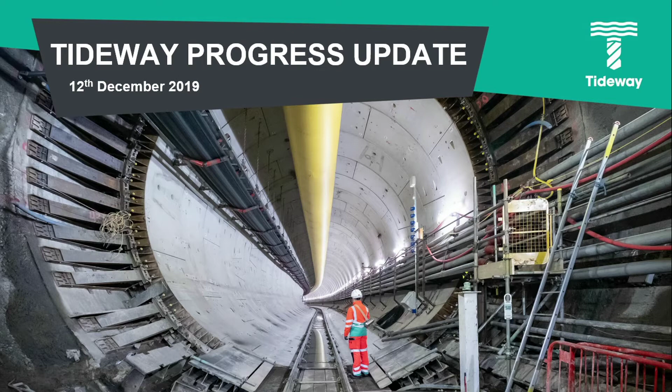Thank you, Ivor. Good evening, ladies and gentlemen. Thank you for the opportunity to give you an update on the Tideway programme and the work we're doing. I'm going to be very brief because the main event is the 4 guys who are going to get into the detail, and that's who you really want to hear from. So this is just a very brief overview of the programme as a recap in case you're not familiar with it - a quick overview on where we are on the project overall, and then I'm going to hand over to the guys.

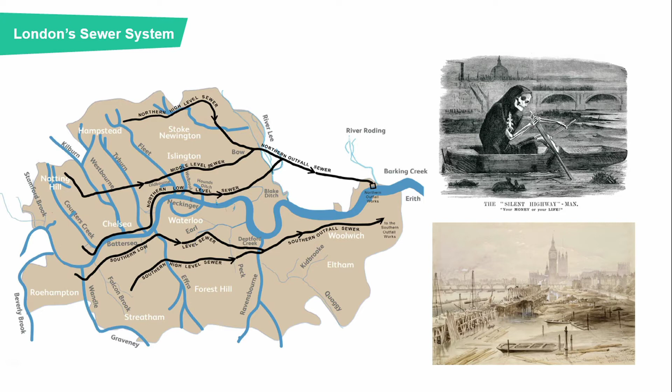We've been through the introductions. I'm sure many of you are familiar with this, so I'll be very brief. This is what London looked like in the 1850s - all of the tributaries flowed into the River Thames. The river basically was the sewer system, and people were pulling drinking water out of it. There were major cholera problems, a huge public health issue, and something had to be done about it. Sir Joseph Bazalgette was the city engineer. He undertook a fantastic project to build interceptor sewers, which intercept the tributaries and carry everything out to the east, to the estuary, solving the problem.

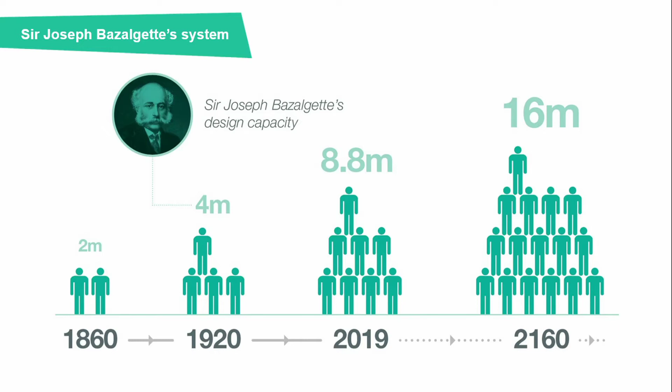It's a fantastic piece of work, still in brilliant condition, but the problem now is capacity. Sir Joseph Bazalgette designed the scheme at a time when there were 2 million people living in London. He designed it for a capacity of 4 million people. But now there are nearly 9 million, and it's continuing to increase. The issue is capacity, particularly in the summer when there are short duration rainstorms. With the amount of hard paving in the city, rainfall gets into the sewer very quickly and it reaches capacity, overflowing into the river in places like this.

These were overflows designed into the system as a safety valve, but there's now on average 50 million tonnes of untreated sewage going into the River Thames every year. Because the Thames is tidal, that doesn't flush out of the system very quickly - it goes downstream and comes back upstream, and can take a couple of months to get out of the estuary. It's harmful to health for people who work on and use the river for leisure purposes. It obviously looks pretty bad for one of the world's greatest cities, and it kills fish.

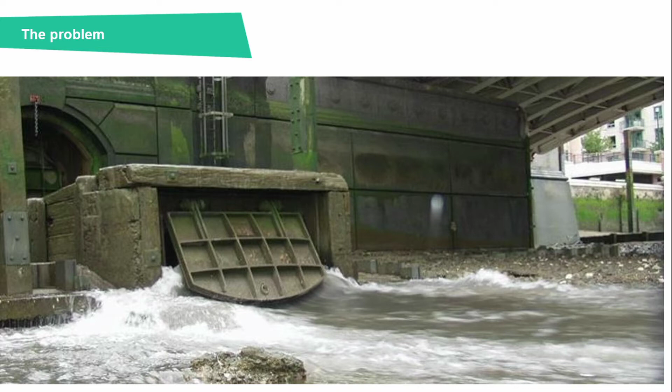If you get a sewage plume going into the river, it can have a big effect on the fish population. It can kill fish when they're spawning, and the Thames is a spawning ground for fish in the North Sea, so this is a major problem. But fortunately, we're here to do something about it.

So the sewage, when it's operational, will overflow into the shaft and down into the tunnel. Our tunnel is basically a big storage system, and then when the rainstorm has passed, it can be pumped out through Beckton Sewage Treatment Plant to stop the sewage going into the river.

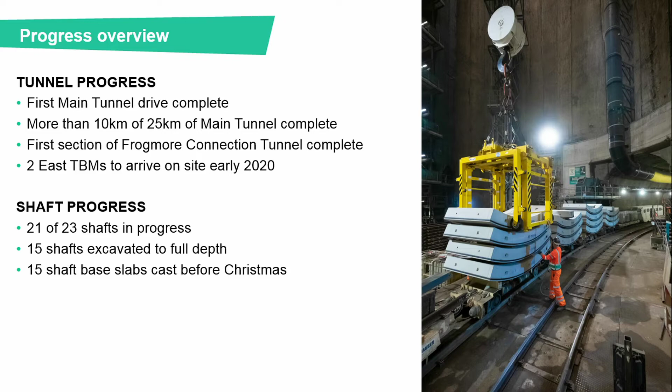In terms of the shafts, we've got 23 shafts. Of those, 21 are at various stages of progress, and 15 are at full depth. As of tomorrow, 15 of those will have their shaft base slabs in. So again, we've made really good progress on the challenging work of getting the shafts excavated through some pretty difficult ground conditions and in some quite complex locations, which the guys will talk about.

So really, that's the kind of overview. I'm going to hand over. We've got presentations from Lee and John and Tom on Albert, Putney and Blackfriars sites to give you a flavour of what's going on there, and then Ed's going to talk about the TBM drives and what we're doing on the TBMs, and then I'll come back and just do a very quick wrap up.

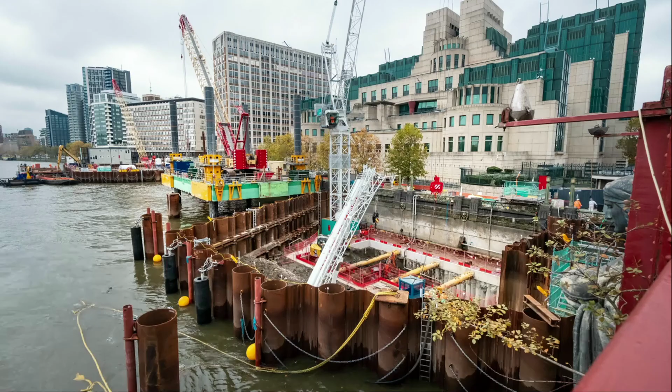I think this photo shows where we are in relation to the land. We're all out in the river. We've got very little space on land to actually do any of the work we're delivering here, which makes it a real challenge, and as Andy was saying, the marine logistics become key.

I put this slide up to sort of pick up on some of the stakeholders we've got. Obviously, being in the river, we have quite a few consents with the Port of London Authority, Environment Agency. You can just see the river wall in the background there that we're amending. The Marine Management Organisation as well.

The bridge here that the photo is taken on is Vauxhall Bridge, so one of TfL's key assets in the area. Behind, you may recognise a building from James Bond films, which features as MI6, so we have some specific security arrangements around that. And then the buildings in the background are owned by the Duchy of Cornwall, which is Prince Charles's trust. So some challenging stakeholders to deal with.

The button's not working. I'll try that again. There you go. I went backwards.

What are we doing at Albert Embankment? We're picking up 2 combined sewer outfalls, one either side of Vauxhall Bridge. So at the top of this picture, you can just make out Vauxhall Bridge there. The Brixton sewer runs on one side and the Clapham outfalls to the other. We collect the sewage from both of those. We take them into the interception chamber, which is the green structure on the diagram.

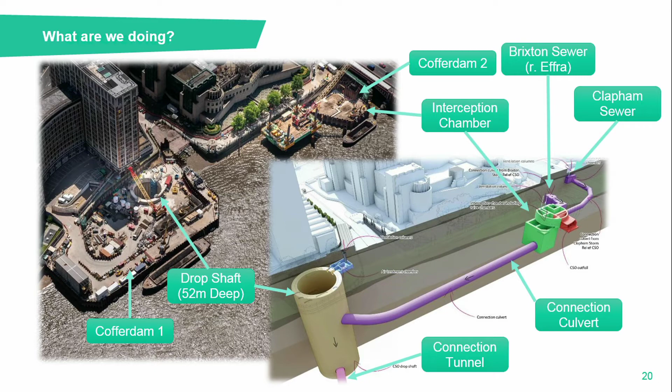So this is just a picture of cofferdam 1 that was being installed. This is formed from twin wall sheet piles, it's been backfilled in the middle with ties across between them. It's quite a substantial structure.

This is partly because as we do the works, we have to remove parts of the existing river wall. So to ensure London isn't at risk of flooding, we need to replace that river wall with a substantial structure. So our cofferdam becomes the temporary river wall for London.

It also needs to be able to deal with ship impact protection. If a vessel became loose or was out of control and struck the cofferdam, we'd want to make sure the flood risk is managed, but also the safety of our workforce on site is controlled.

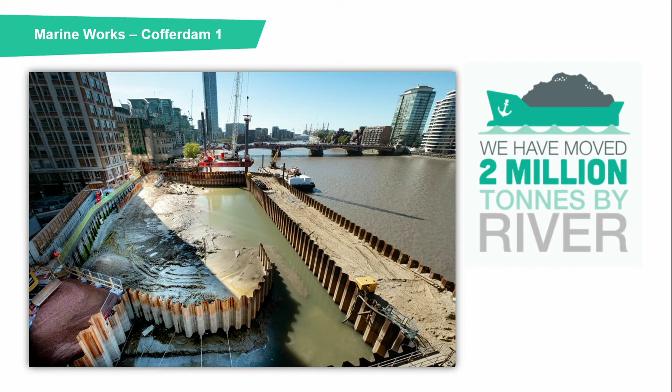And then this is during construction, so you can see some of the marine vessels that were used during the construction of that piece of the work.

Cofferdam 2 is slightly different construction. There isn't the space here. We've got no access at all. We do have some road access into Cofferdam 1, but here we have nothing. So we're just next to the Thames path.

The retained height of that is about 8 metres. So these are quite substantial structures.

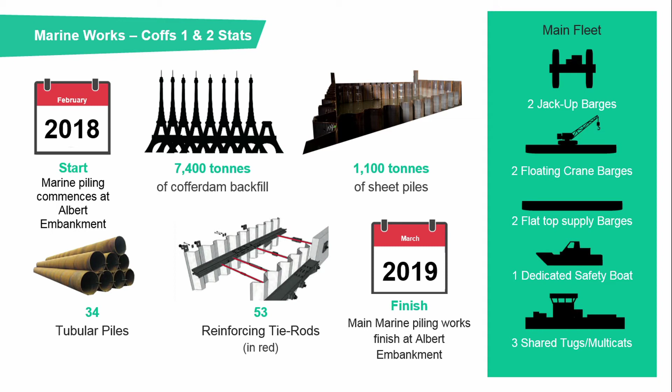Just some stats on those first 2 cofferdams. We started work in 2018 on those and finished them earlier this year. You get a good idea of the large marine fleet that was used to install those, a mixture of jack-up barges, flat-top barges and various support vessels.

The team adopted some best practice to try and reduce noise, because a lot of those piles were vibrated in, or they're driven in with impact piling. We have buildings which are immediately adjacent to the work, and we installed significant amounts of secondary glazing on one of them with air handling units to manage and mitigate that noise level.

But to achieve the best practical means for controlling noise, we also used these cameras that pick up where the hotspots for the noise are on the various pieces of plant, and then the mitigation can be developed around where those hotspots are, so you can put shrouding or other details around it.

For example, in the diagram at the bottom, it shows a real hotspot of noise from one particular area of that bit of plant. Not something we could do about immediately, but potentially the manufacturer of that bit of plant could amend what they're doing for future projects.

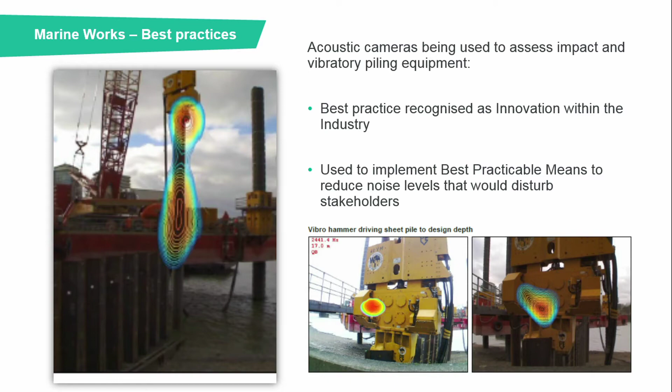Our third cofferdam isn't yet constructed. We mobilised just last month, and there's a picture of it just there. It's much smaller, the current scheme that we're doing. It's the other side of Vauxhall Bridge. So again, we have very limited access to this area.

And there was a real challenge that was faced during the design development. So if I just show this out here, the red line was the original cofferdam proposal. You can see there that the cofferdam used the bridge pier of Vauxhall Bridge as part of the cofferdam, which presents some challenges in convincing Transport for London that's an acceptable approach.

But also, this would have been a large structure, so we would have had piling within about 3 metres of the Victoria line. London Underground had a number of concerns around that, which we would have had to address, and it would have been a large amount of night working and significant noise at night as well to install some of those piles. So the team at Ferrovial and Laing O'Rourke, who were delivering this, came up with an alternative.

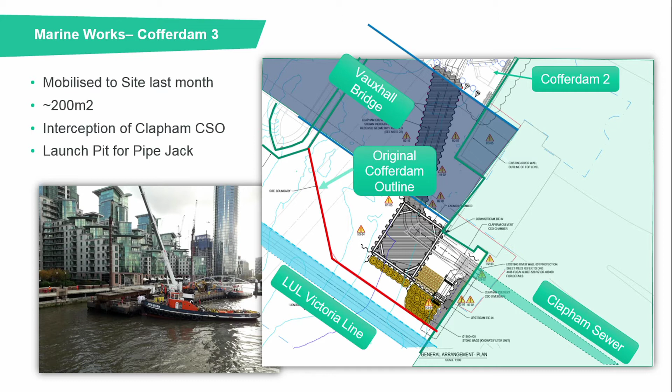And they adopted a tunnel technique, so very suitable for today. They shrunk the cofferdam down to just a 10-metre square, which you can see there. Then underneath Vauxhall Bridge, they're going to install 2 lines of sheet piles, a twin wall arrangement, and they'll form a cut-off wall. The alluvium and made ground on that will be removed, replaced with lean mix concrete.

Then a capping slab put on to watertight that section, and then we'll be doing a pipe jack beneath that part of Vauxhall Bridge to connect up cofferdam 3 here to the rest of the works in the interception chamber. So there's a really good development of the design as we progressed.

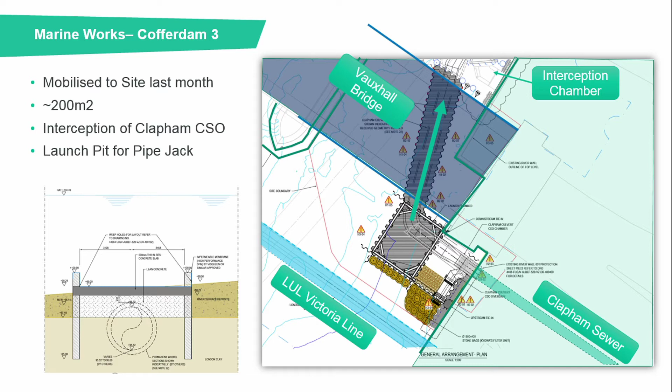Moving on then to the shafts and the tunnelling works. Here we've got an image from in the shaft. It just shows one of the challenges we've got. So you can see the secant piles coming up out of the ground.

The top half of the shaft, about 26 metres, is secant piles. And then below that - I've done my numbers wrong here - it's 15 metres of sprayed concrete lining below those piles. So we've gone down quite a substantial depth, 50 metres in total.

And we're only about 4 metres away from the nearest building. We go deeper than the foundations for that building, which is Camelford House, which you can see in the picture there. A lot of work was done to check that we were safe to excavate and model the impact on that. The impact we've had on that building, having undertaken the works now, has been significantly less than was predicted, so it's a really good result. The team that delivered the SCL works did really well with that.

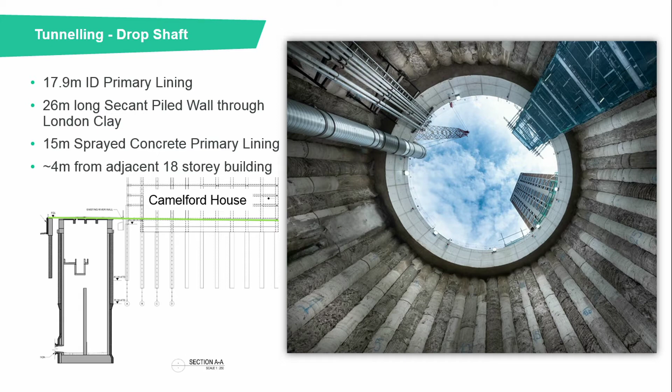It's just some details on the geology we took the shaft through. The purple band is the London clay. So the secant piles went into that, and then the SCL work started below that section. We went very deep - where most pieces of work in London have stayed in the London clay, we've gone down underneath into the Lambeth group to get down to the main tunnel level.

Because of that, there are some sand lenses in some of those deeper sections, and they needed to be dewatered. So there were surface level dewatering arrays installed, but also when we got down to a suitable level, there were vacuum pumps installed within the shaft that drew down some of the sand channels and took the water out of there.

Unfortunately, as we continued to excavate, the team discovered a perched water table. There's a band of clay which sealed off the sand channel halfway through, and they dealt fantastically by draining out that extra perched water table, modifying the SCL works as they went down, and progressed through that with very little difficulty in the end. But it could have been a real challenge having discovered an unexpected bit of formation in there.

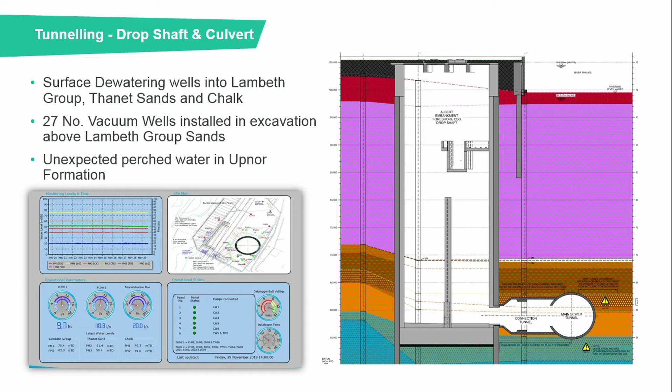We've also included there the dashboard, which just shows some of the monitoring details. We have a huge amount of monitoring on the project, but that's from WJ Dewatering - that's the dashboard that shows us how well the dewatering system's performing, which is reviewed every day.

But this work was delivered 6 weeks ahead of programme. The team did a great job in delivering that.

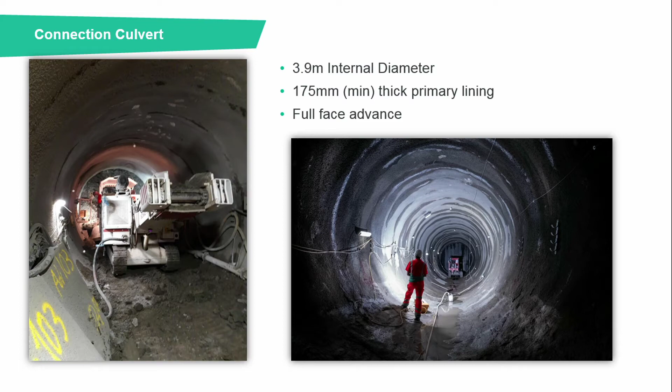We had some really good innovations that the team came up with in developing the work. This Cantideck - you see them quite commonly on high-rise buildings - was adapted for use in the tunnel, so what it's hanging out of there is the portal for the connection tunnel. So the tunnel was built, we installed the Cantideck there, and then continued shaft excavation cantilevering out from the shaft.

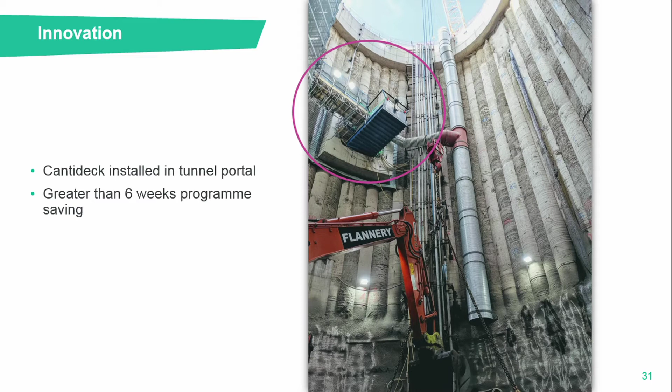And that meant that the works to install the waterproofing and the secondary lining could progress in parallel with the shaft excavation. Again, a fantastic saving on programme that's delivered.

And I find a bit of best practice. Lifting in these tight shafts has been a real challenge, ensuring that everyone's safe, having heavy loads over people. So there's some really good controls that have been developed and shared, and they're very simple to make sure it's easily communicated when there's lifts going on who should be excluded from various areas.

We've also implemented a clash detection system on the Cantideck because it's quite a big structure sticking out into the shaft - there's a risk of being hit by loads. There are laser beams that detect any movement, so the crane driver can see any effect, and if he's got a load that's going to clash with the Cantideck as he's lifting and lowering it.

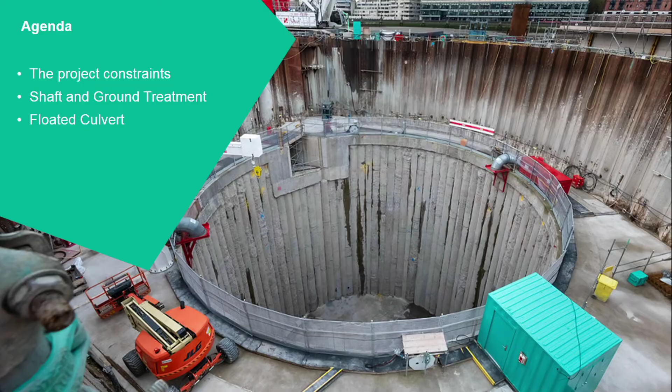Blackfriars is one of the more central sites of the project. It sits within the City of London, right next to Blackfriars Bridge, and is right up against a listed river wall. Within that river wall is the service subway built by Bazalgette and the lower level sewer, and the service subway contained two large low and medium pressure gas mains that were very sensitive to ground movements. We're also next to Victoria Embankment, which is a major TfL highway.

Just north of the embankment is the District and Circle line for London Underground. Then you can see there the Waterloo and City line, that's 6 meters below the riverbed level and straight through our site. The bridge itself is listed.

And just to make all of that a bit more fun, the purpose of Blackfriars is to pick up two sewers, one of which is the Fleet sewer, which outfalls underneath Blackfriars Bridge. That means you can't get any cranes to it, and the distance between low or high tide and the river and the deck of the bridge is pretty negligible. The second sewer we're picking up is the lower level sewer, which will be a side entry into the listed river wall.

So, full of constraints, and to add on to all of that, as Lee explained with Albert, we're basically building everything out into the river, which has its own constraints.

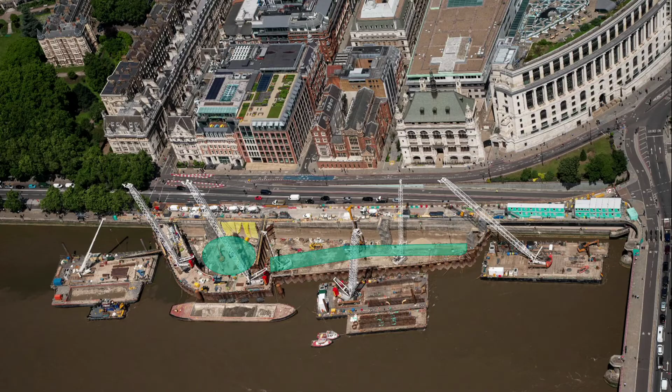Here you can see, because I didn't have the new aerial photograph, where the shaft is located and also where the floated culvert is being constructed, and more about that later.

So on to the shaft first. During the tender, the reference design was a diaphragm wall toed right into the chalk strata. As the project evolved, we worked with Tideway to alter the shaft scheme into a sprayed concrete lining shaft.

So the top half of the shaft that you can see on this side of the screen is secant piles, toed just into just above the bottom of the London clay, and then it's 25 meters of sprayed concrete lining below that. The main purpose of that, and the advantage to the project, was to effectively de-link Blackfriars from the tunnelling progress, because the diaphragm wall scheme needed the entire diaphragm wall constructed and the shaft excavated to allow the tunnel boring machine to enter the shaft and have a free air intervention.

With the scheme as it currently is now, we're actually going to construct the bottom half of the shaft around the completed tunnel after the TBM has passed through Blackfriars, which is programmed to happen in January next year. So that is quite a change, and with that evolution of the design, it needed some quite innovative thinking, which is where the ground treatment works came in.

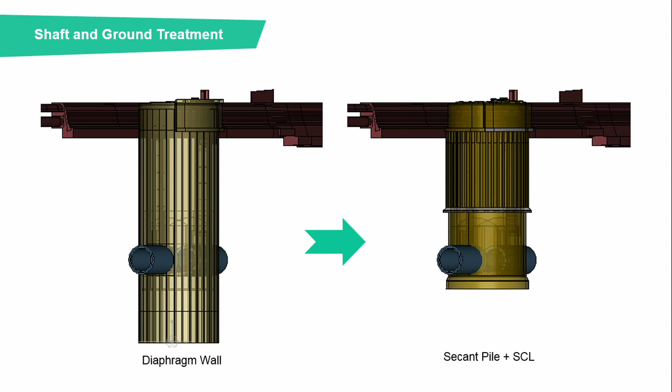The braces part of the belt and braces approach was probably the more innovative bit, which was to undertake the deepest jet grouting curtain ever done in Europe by Keller's group. The jet grouting was undertaken to 52 meters deep, with interlocking jet grout columns that effectively replaced the granular strata with jet grouting soilcrete, so that when we were undertaking the shaft excavation using spray concrete lining, we de-risked any loose and running sand.

Because the TBM is also coming through into virgin ground and now doesn't have free air to do its intervention in, we also did a jet grout block for the TBM, which is located just here. So there was a slight risk of wet ground that could unravel when the team were going to undertake the intervention next year. We basically decided that because we were doing such extensive jet grouting for the shaft, we would also undertake that block just to be sure.

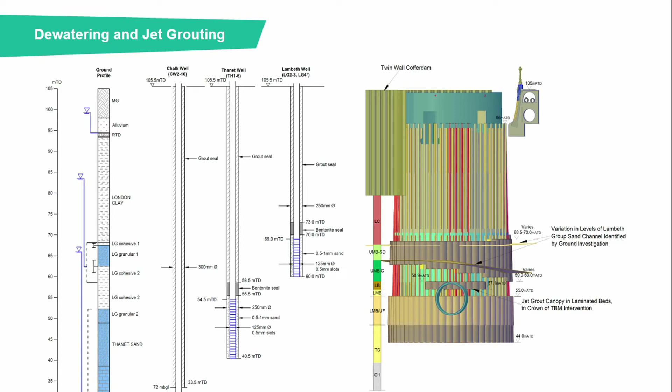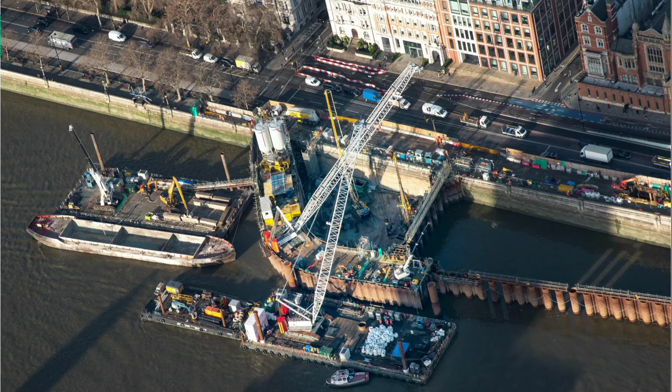So in order to validate our jet grouting work, we did a 3D model as the jet grout columns were constructed. Every day at 4 o'clock in the shift review group, we understood the columns that had been constructed that day and their position and verticality tolerance from the equipment on the jet grout rig, and basically plotted out live what we'd done. We'd had a specification agreed mutually by all parties on the project as to what we wanted to achieve with the curtain and the interlock, and then used this 3D model to decide whether we should do any additional columns.

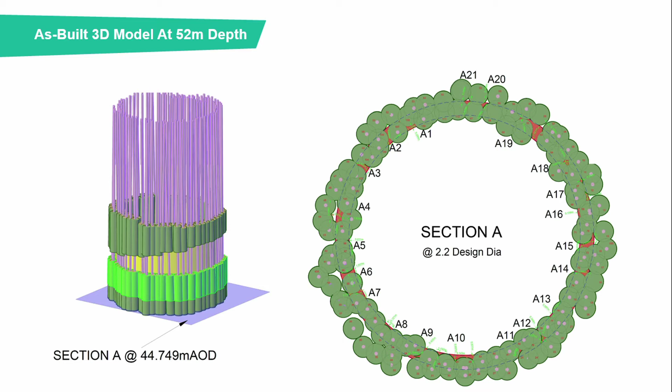In the end, we only needed to do 4 additional columns out of the 139 constructed, because we felt that the gaps, there was a risk that those gaps might be too large, and we wanted that full interlock throughout.

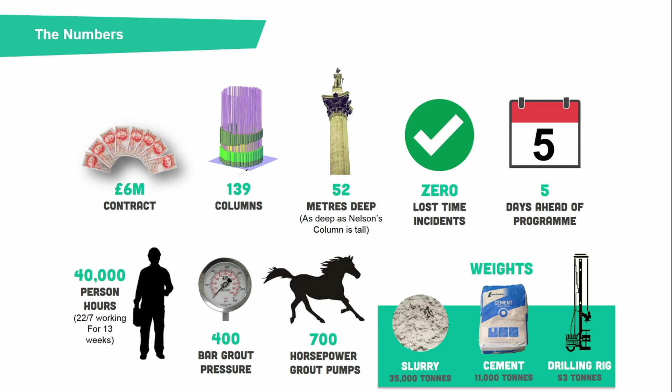Just some statistics - as deep as Nelson's column is a nice one, but more importantly, we did 3 months of 24/7 working without an incident, which is a fantastic achievement by the FLO team and Kellers. We were 5 days ahead of program with 40,000 person hours. It's a huge achievement for the team, and really credit to everyone in Kellers and FLO that was involved.

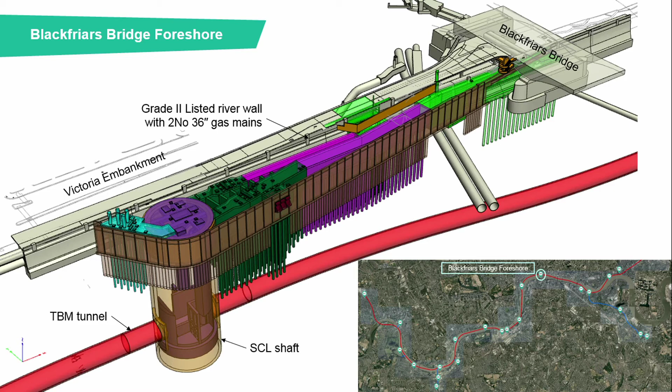The reason for the floated culvert is that the connection to the Fleet sewer is underneath Blackfriars Bridge. But with the Waterloo and City line being so shallow, and the reference design having a cofferdam around the bridge pier that City of London were not comfortable with, we had to move away from doing anything in the dry and go towards an innovative solution: building the culvert in the eastern cofferdam, flooding it, and floating it out underneath Blackfriars Bridge, which will happen by May next year.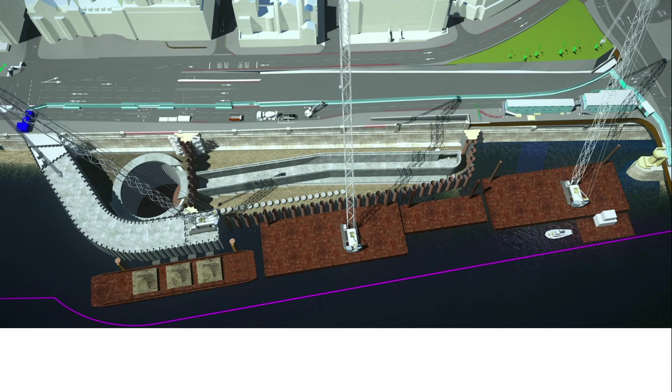We then put freeboards on top of the floated culvert to manage the tide levels while it's floating, because we can't build the entirety of the structure or it won't float. So none of the roof and parts of the rest of the structure are present in its temporary state for the float-out operation.

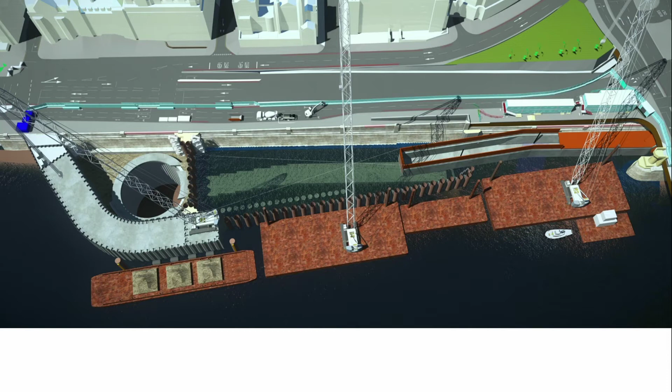We then open up the cofferdam and flood it, do some flotation trials and checks of all our equipment, and then you can see the winches — we'll effectively winch out the structure underneath Blackfriars Bridge. The operation happens over a relatively short period, a couple of hours, with brake winches on the back and pulling winches on the front, plus other temporary works such as catches on the cofferdam and on the river wall to get the tolerance of the floated culvert correct.

Then we reseal the cofferdam around the floated culvert once it's sunk down, drain the cofferdam, and start all the in-situ works within the eastern cofferdam again to connect the floated bit up to the shaft. Meanwhile, the in-situ section of the floated culvert is a separate operation where we complete the structure, including the roof, and fully connect it up to the Fleet sewer.

Meanwhile, at the far end of the culvert, there'll be an opening to allow the live sewerage to flow out east of the works, so nothing comes into the culvert or into the site.

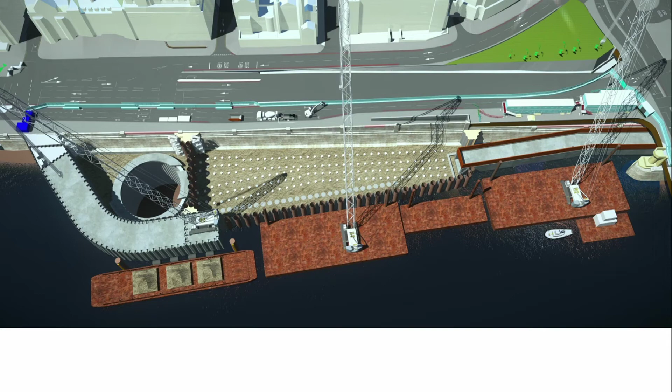To de-risk this operation, we undertook a 1:25 scale model of the whole culvert and its movement at a university in Spain, in Cantabria. Here's an image of the full mock-up — we floated the culvert out of the cofferdam under the bridge successfully numerous times, and we were all happy with that operation.

So much so that we got Tideway's project manager to do the actual winching trial in Cantabria, and prove that he, without any experience, could do that operation safely. This gave us a really high level of confidence.

Here are a couple of pictures of the floated culvert. The one on the left was taken in November when the base slab was in construction, and the one on the right was taken earlier this week — you can see the shutters for the walls going up. It's a pretty large-scale operation: 95 meters long, and the culvert will weigh 3,500 tons when it's being floated.

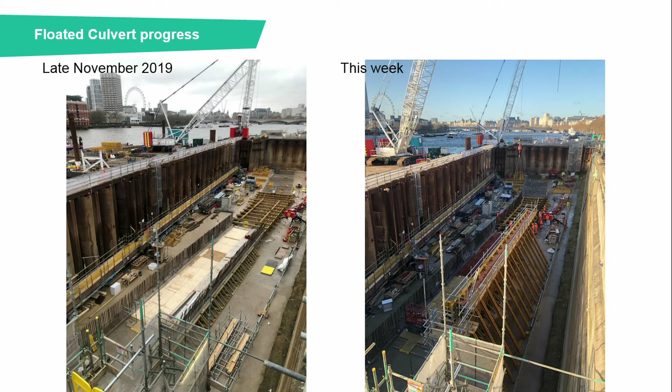The final slide is similar to Lee's, just showing you what the final foreshore structure will look like. It's a huge new piece of foreshore for London. It will unfortunately cover all the civil engineering hard work we've put in over all these years, but this will be a fantastic addition to London's riverside. Thank you very much.

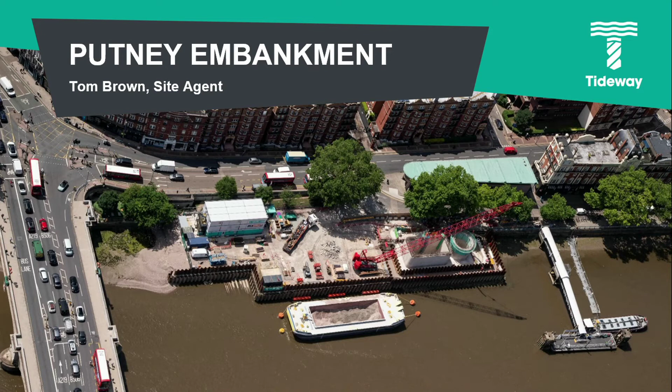As you can see, we are a serious postage stamp of a site. There's some interesting marine works, but I'll focus tonight on the tunnelling elements, because you've got to know your audience. So, talking you through the site.

We're looking at Putney Bridge here, which is a Grade 2 listed structure. The existing Bazalgette CSOs come out beneath the bridge arch on the south side. We have an existing slipway where boats are launched down into the Thames, and we are home of the boat race starting stone for the Oxford and Cambridge boat race, which occurs every spring.

We're also at the tail end of the Thames Clipper service, which runs onto Putney Pier, and immediately west of here is what's deemed the busiest section of rowing water in the world, with all the boat clubs that Putney is very famous for. Basically our site area occupies the area between the bridge and the pier.

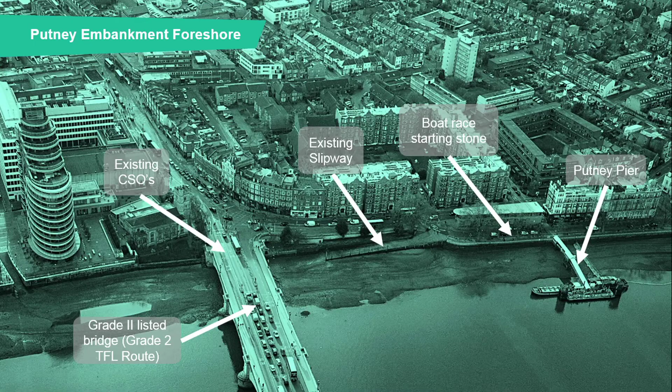So this is the solution which we've implemented. It differs in a number of ways from the original design. We worked with a contractor called Waldenberg, who optimised a number of elements of the design and were also responsible for substantial portions of the construction.

The section in green is the only area which remains visible after the project is gone. You can see all the other structures are temporary, quite significant, and are all removed again at the end of the project. As you can see on the right, the existing CSOs come through there.

They then enter into a tunnel, head west through a connection culvert tunnel, or high-level tunnel, into the valve chamber, which is the rectangular structure, through into the shaft, down 36 metres in a 6-metre internal diameter shaft, and then out 43 metres in a 2.2-metre internal diameter tunnel out to the main tunnel drive.

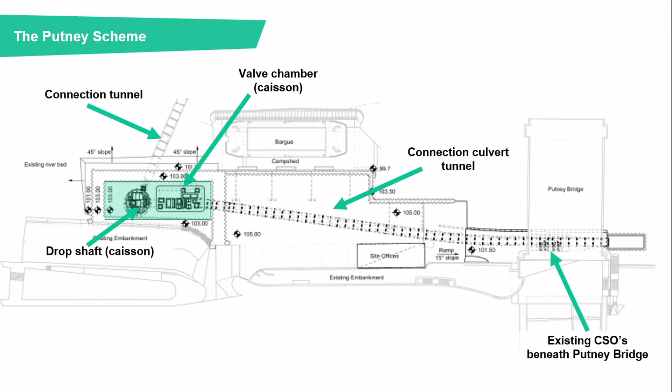From the two structures you can see within the piled structure, there's a large rectangular structure which is the valve chamber and the drop shaft. Both of these were dug using an in situ caisson method, which is not too common, but I'll tell you why it was a good idea.

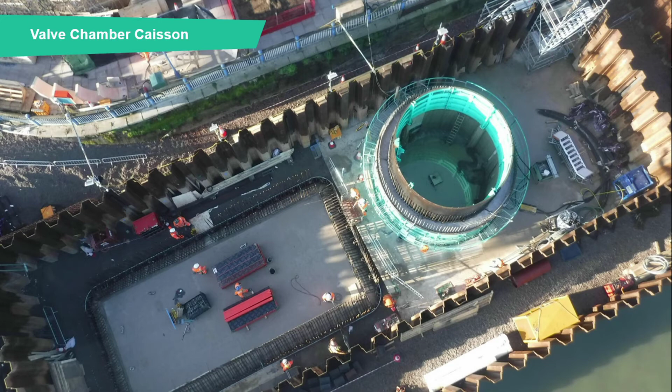This image shows the cutting edge as it was installed on the valve chamber on the left. This is part of Ward & Burke's forte. They do a number of these projects and have done them up north and also in their North American division. So this was installed here.

We then moved on to building effectively the whole structure above ground, the valve chamber, so a heavily reinforced concrete structure culminating in two concrete pours, one of which is shown on the left, about 210 cube concrete in there.

We then had one huge structure, which we sunk into the ground in 10 working shifts. Absolutely excellent method: one excavator in the bottom and a skip on the end of the hook, and that's how we dug that caisson. Really simple, with a number of great benefits, no exposed ground, all the ground's beneath your feet, really limiting any risks to the workforce there as well.

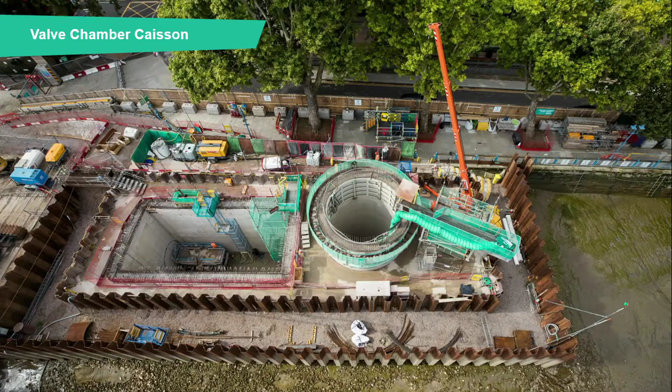On the left you can see that structure sunk down to formation level, so you're looking at about 10 metres deep there with a permanent slab put into place. If you look closely at the left-hand side of that structure, you can also see the eye being formed where the future high-level tunnel eventually leaves the structure.

At this point, I'll move on to the drop shaft, which you can see on the right. So again, an in situ caisson method, absolutely excellent given the constraints which we have here.

The permanent structure is the inner piled structure, the only permanent works section that goes out into the river. Because of this, the shaft is only 6 metres in internal diameter, so a really challenging environment. But given the methods used, and only one person down at the bottom during the excavation sequence, it was very manageable.

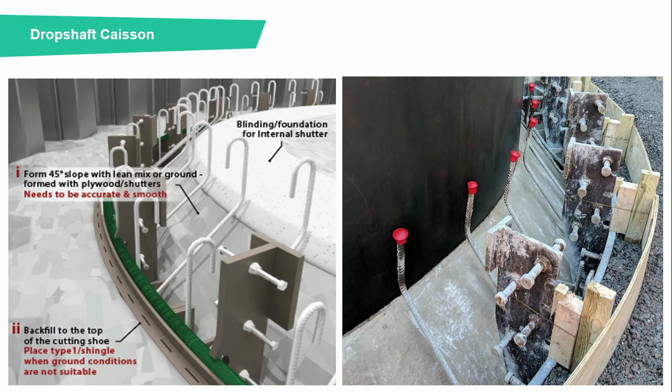On top of this, Ward & Burke also do a lot of 3D work. They use this in their method statements and for briefing their guys at the sharp end. Really successful, probably best in industry right now. Really informative and easy to understand. As you can see, the one on the left looks very much like what happened on site there, and we had no problems with quality at all.

Similarly, with the image on the right, it really explains how that operation goes from day to day. As I described, all the muck is below you the whole time, and it actually peels up towards you, so the muck is probably about 1 metre above the cutting edge at any time. So your risk of losing any bentonite in the annulus is exceedingly low.

All the lubrication is fed through cast-in pipes in the wall of the caisson. Both in the valve chamber and in the drop shaft structure, it's a single pass lining. We do not have any secondary lining. It's been designed to cater for all the requirements it needs. That's a fantastic saving in programme, and also reduces the exposure for guys working at height during that period.

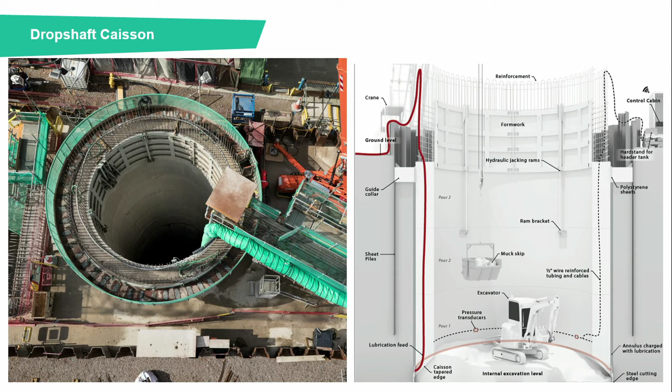So this shows the system again. The shutters were bespoke but used over and over again. With the valve chamber, we built the whole structure above ground and then sunk it. With the shaft, we worked sequentially, going round and round. We managed to optimise some of the steel fixing by prefabricating a number of elements, and at peak we were able to achieve a 3-day turnaround between excavating, steel fixing, concreting, and excavating again.

Very efficient method. As you can see here, the inner shutter could be hydraulically lifted, which immediately provided edge protection for all of the steel fixers working there, along with a bespoke outer shutter with a designed walkway to access the works.

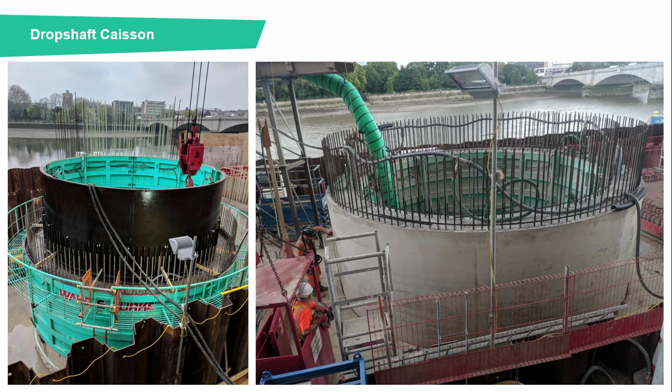The added advantage of this technique is you pour your concrete at ground level, you can strip your shutters, and you can see that you're happy with it. Any problems would be visible, though we didn't have any at all during our works, so you get full visibility of everything before it even goes into the ground. That's another real good advantage as well.

In terms of controlling these structures, Ward & Burke have a number of employees from Oxford University and a research arrangement with them as well. One of their engineers' theses was on the use of this levelling machine which they came up with. They had a header tank based at ground level, then used pressure sensors in the wall, tabulating that with computer coding to create a readable iPad system used by the excavator driver sitting in the base of the shaft.

The elements shown there, the single digits, were all in millimetres, and we believe it's around 1 to 2 millimetres accuracy. Very simple for the driver - green means dig, red means don't dig. That kept everything nice and even all the way down.

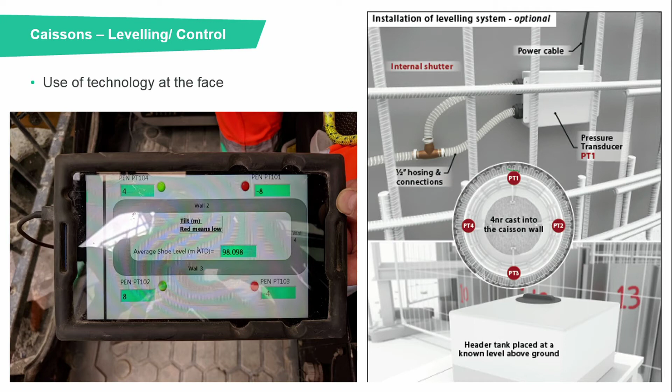Absolutely fantastic tolerances all the way down, and quality throughout. It also limits the amount of time engineers need to spend down at the face, and limits the number of lifting operations required during the works. That was a real success, and it was used on both the valve chamber and the drop shaft itself.

Moving on to the high-level tunnel, which is in progress as we speak. Our TBM is working now, probably somewhere around here, having launched out of the valve chamber in November. The tunnel is 135 metres long, with an external diameter of about 3 metres and internal diameter of 2.2 - a very small tunnel. Shown again in plan here, you can see a straight section, then a slight curve coming round to come perpendicular to the abutment of Putney Bridge.

We've had a number of issues into November getting started, so we've had to mobilise a gang last week. We flew in another gang from Canada to go 24-hour working, which has had the desired effect, and we're now progressing very well - hoping to finish early next week, just in time for Christmas, which is good.

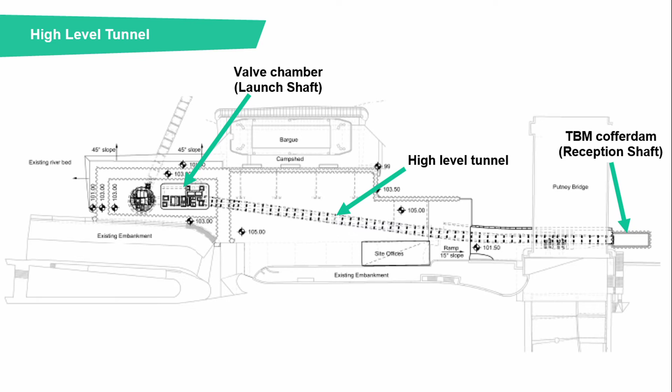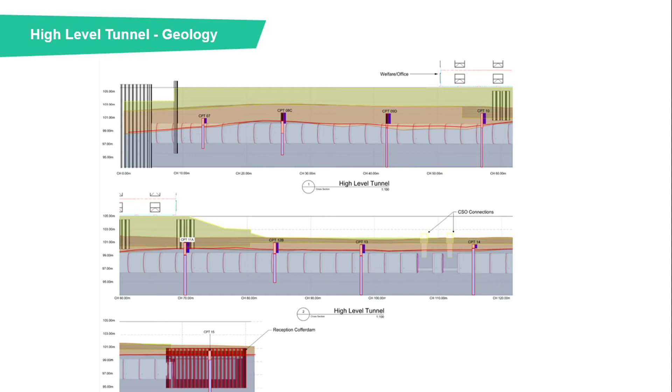In terms of geology for the high-level tunnel, it's really challenging in terms of how shallow the tunnel is. In natural ground, you're looking at around 3 metres overburden. In many areas the cofferdam has added overburden on top of that, and in the area below the bridge we've added an additional 1 metre of aggregate to help constrain the ground above the pipe jack there, which has worked successfully.

They're also a composite lining, so again we've gone for a single pass solution - concrete external layer, steel can, and a concrete internal layer. The elements required to finish the tunnel are a welded joint piece to join all the cans together, and then a grouted joint which works its way through the tunnel. The other efficiency here is this pipe is actually the same design used on both tunnels, high level and low level.

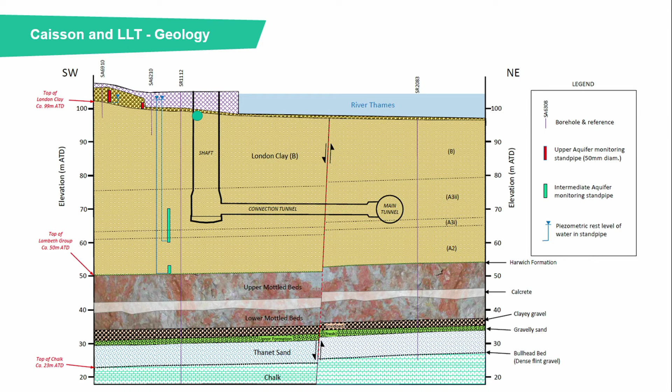So here we see the tunnel in cross-section here, again showing the pipes which are there pushing through to the main tunnel. The original design showed a timber heading structure to join into the main tunnel. We're very rapidly considering another option, which includes jacking slightly closer to the main tunnel, and then a much smaller timber solution, which relies on a circular opening rather than a square one. That's an efficiency we're hoping to push through for February next year.

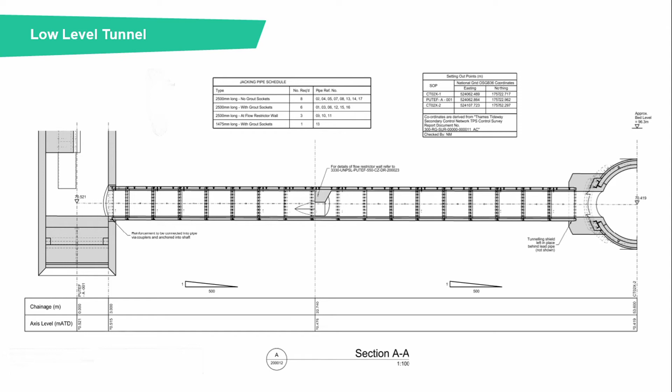So in terms of our lessons to learn, some of the best things we've done, I think, are definitely our single pass linings on the caissons - a real reduction in working at height there, and the end product, the quality is excellent. Putting another lining over it would be totally unnecessary. I think anyone who visits the site can see the quality of what's there.

The composite pipe design, as I've mentioned, doing secondary lining in a small diameter tunnel is exceptionally manual and very difficult. We have a finished lining of 2.2 metres in diameter, so the moment you put any shutter in there, you're really down to almost going down there on a skateboard, so it's on your back.

So we're now looking at the in situ caisson method. I mentioned the safety benefits really limit the amount of people that need to be involved. We've achieved all the work that you've seen in the pictures here with a gang size between 8 and 15 people. It's only in the last 2 weeks that we've added another 8 to go to 24 hours. But what that means is we have small teams. We can have an open environment where everyone knows each other and everyone can challenge and talk about issues that we have. That's really been a noticeable part of having a small team here.

All of the design elements there all look incredibly simple, even in plan and in section - very easy to understand, and you'll find that the caisson structures have all gone exceptionally well because of the simplicity, and all the hard work was done in the design rather than leaving it to complex details at the site.

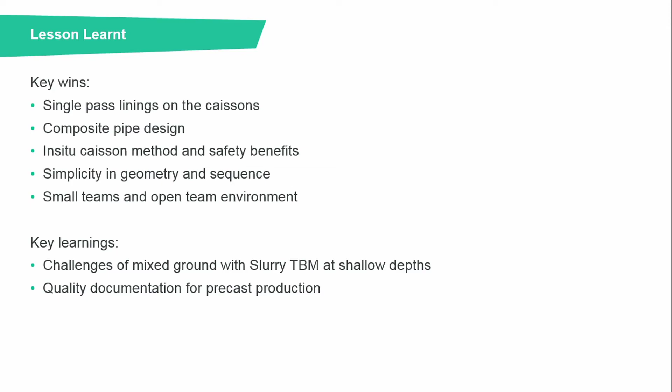So, evening, I'm Ed Lewis. I work on the central section of Tideway, and I'm going to be giving an overview of the main tunnel drives, some of the challenges and constraints, and finishing off with a progress update of where we are currently.

Starting with the geological model, as Andy explained, Tideway is split into three construction contracts, west, central and east, geographically, but that also follows the rough geology at the depth of the main tunnel. The western contract has a 7-kilometre drive in the London clay. The central section consists of a 5-kilometre drive heading west from the Kirtling Street site, up into the London clay, but launched from mixed ground in the clay and Lambeth group, and a 7-kilometre drive heading east from Kirtling Street to Chambers Wharf, starting in the same ground and then travelling down through the Lambeth group, Thanet Sands and into the chalk before Chambers Wharf. The eastern contract is a 5.5-kilometre drive down through the chalk.

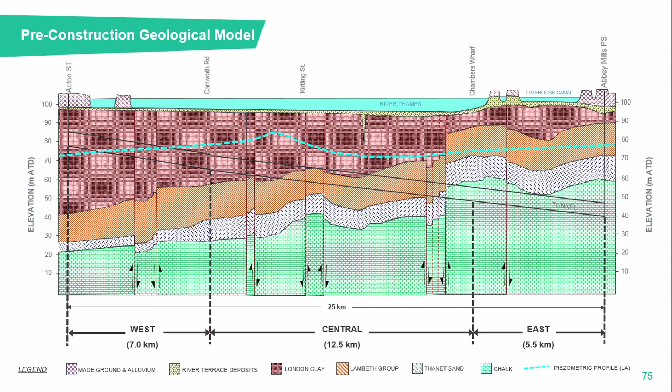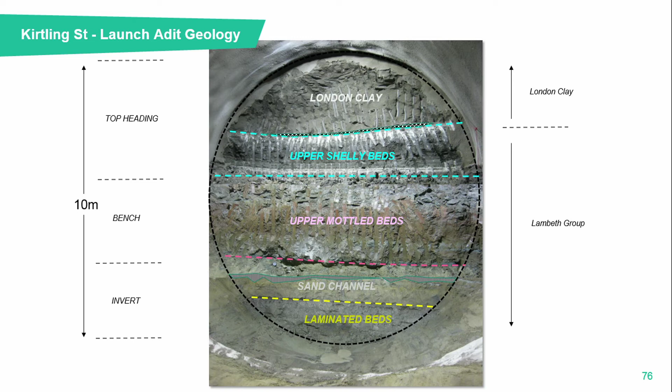If we look at the Kirtling Street site in the middle, which is a double drive site, this shows the geology observed during the SCL advances to construct the launch chambers. This is a few photos stitched together from the face logs during the SCL works, showing the mixed ground with the London clay in the crown, and some of the upper layers of the Lambeth group lower down.

There are 4 TBMs constructing the main tunnels: 3 earth pressure balance machines, 1 for the western contract and 2 on central, with a slurry machine used on the east. Relating to the geology, top left is TBM Rachel in the west, driving through the clay. Bottom right is TBM Millicent, used on the western section of Central, again up through the clay. The other two pictures show Ursula, also on Central, which drives from Kirtling Street down through the Lambeth group and the more mixed ground. You can see the slightly more closed cutterhead arrangement with a lower opening ratio.

Some of the constraints on site: all of the TBMs are being driven from shafts, which necessitates an umbilical style launch, whereby the cutterhead of the machine and the first few gantries can be lowered down and start excavation, with the remaining gantries and backup on the surface connected via umbilical hoses. The machine then progresses into the ground, and as you create space behind, you lower the remaining gantries until you're at full configuration.

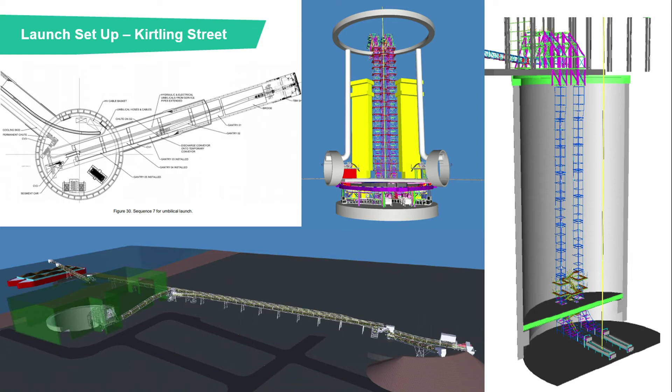Andy briefly went through the marine logistics and the commitments on Tideway. I wanted to show what that meant for a site such as Kirtling Street. At peak production, we'll take away 4 muck barges, around 6,000 tonnes of spoil a day by river, and also bring in a segment barge, shown bottom right, carrying 30 tunnel rings. That alone in a single day removes the need for over 250 HGV movements in central London, and that's just one drive site, multiplied across all drive sites and CSO sites.

Being in central London, we interface with a number of third-party assets. As a summary: 75 bridges and 45 tunnels.

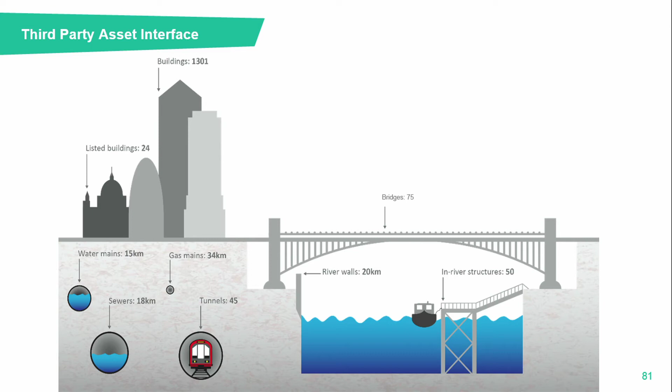One of the challenges of tunnelling directly underneath the river and following its course is we've only got limited transects where we can monitor the performance of the TBM in terms of settlement and calculate volume loss. As general best practice, through the SRGs and daily review groups, we're constantly monitoring excavation rates against theoretical quantities, grout pressures and volumes, maintaining a constant loop between engineering, design and construction.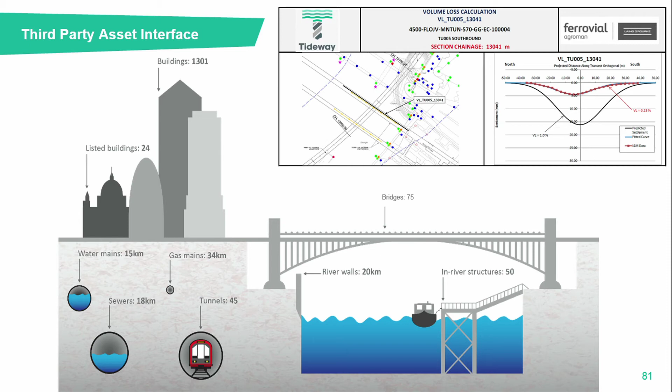To give an idea of performance to date, this shows a volume loss calculation for an underground asset we recently transited earlier this year. The black lower line shows the theoretical volume loss settlement for a 1% volume loss assumption, and the red dotted line shows the actual measurements observed, which equate to just under 0.3% volume loss - quite impressive.

I'll use this opportunity to raise one specific risk - I appreciate this has been discussed at the BTS before - the risk of hypoxic ground, deoxygenated ground gas, which can occur in the Upnor Formation in the Lambeth Group. It occurs with the oxidation of an iron hydroxide known as green rust, often due to dewatering when air is brought into contact with the strata. The subsequent recharge of aquifers in London can trap this hypoxic gas underneath the impermeable Lower Mottled Beds, posing a future risk to tunnelling and works that intercept that strata.

In terms of mitigation, the most important thing is understanding the risk and knowing it's there, and designing systems to cope. Having a robust ventilation and monitoring strategy, standard best practice measures in tunnelling, clear entry procedures, considered and tested emergency response systems, but also timing of work - looking at when to do interventions and avoiding confined space works in these high risk areas.

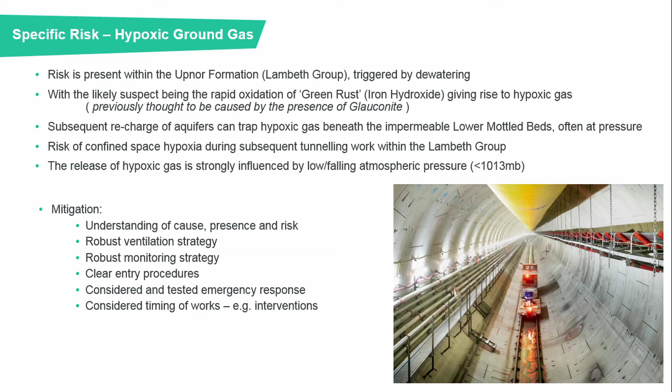To capture a few other health and safety best practices employed on the project, I mentioned the use of the acoustic shed enclosures, but it does so much more than just keep in the sound. It provides a sterile environment, day and night in terms of light, and blocks out the weather throughout the day and year. It also limits the impact on residents and third parties from light, noise and dust coming out of the shaft.

There were a number of lessons learned on the TBMs on Crossrail. That was taken by the contractor and developed for the TBMs on NLE, and that register has further been taken and used by the whole team and the TBM manufacturers on Tideway. Part of the challenge now for Tideway is the legacy and how we get those lessons learned out and make sure they're implemented on future projects.

On the central section at least, we've been lucky with continuity of labour and the TBM manufacturer. Working at Kirtling Street, we're a stone's throw from the Northern Line extension, using a lot of the same labour, contractor and TBM manufacturer, retaining the TBM manufacturer staff for the duration of the drives. As I said before, we've used a lot of 3D modelling, including a virtual TBM, plans of the shaft, and we carry out a detailed readiness review ahead of all major phases of works.

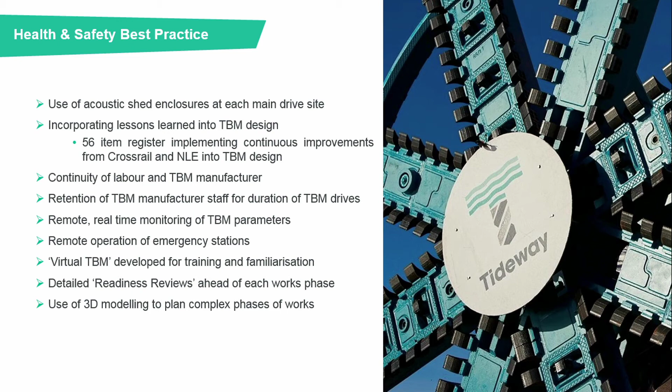Just to close with an update on where we are to date. Main Tunnel A, which is the tunnel in the west, commenced earlier this year with planned completion next year.

Main Tunnel B has already completed, and you can see some stats on the right there in terms of the long average achieved, 15 metres a day, and some of the peak production.

Main Tunnel C is now the only tunnel in operation from Kirtling Street, with planned completion August next year. Long average is currently around 16 metres a day, but with peak productivity, 54 metres a day, and 262 metres in a week being the best to date.

Main Tunnel D, which is the eastern contractor's tunnel, that in the chalk hasn't commenced yet, but that's due to commence in spring next year.

And the link at the bottom of the page there, anyone can click on that and you can view the shot and get real-time information on the current progress of the TBMs.

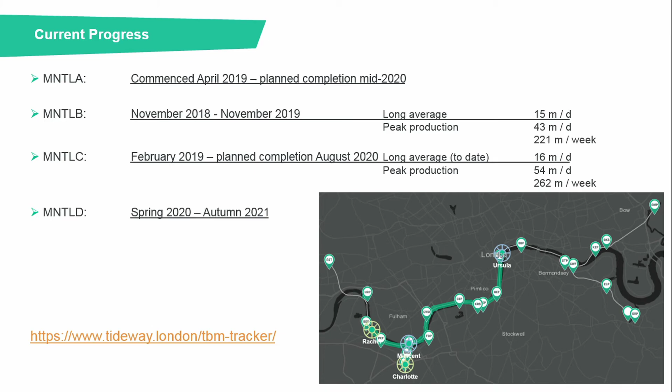Okay, so just a few very quick closing remarks. In terms of the project overall, we're just about 50% complete. We start commissioning towards the end of 2022 and bring the whole system into service in April 2024, handing it over to Thames Water to operate. So that's the broad programme, and we're on track.

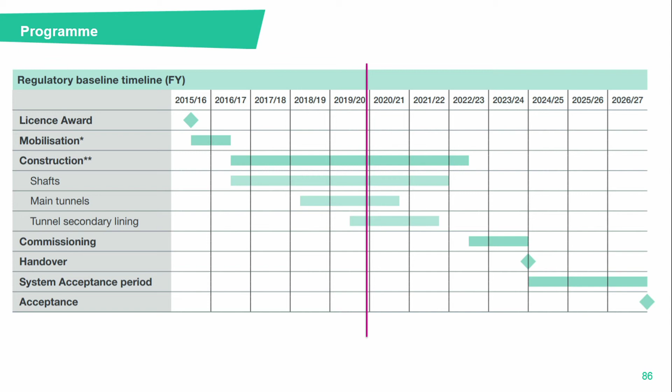So these are massive as well. Maybe that's the subject of another presentation in the future. But we can see the project really taking shape at ground level as well.

Our focus for 2020 is to complete the TBM drives we're on at the moment, and the East team will be starting their TBM drives, mobilising for our secondary lining. All of the tunnels have a primary precast segmental lining, and then there's a secondary lining to go into those. That'll be a key focus for next year.

And continuing the work to intercept the Thames Water sewers. We're looking at commencing the mechanical electrical work, reasonably simple but pretty big scale and needs to be done right. We're continuing to increase our focus on the completion, commissioning, handover phase, and making sure we're doing all the planning for that all the way through.

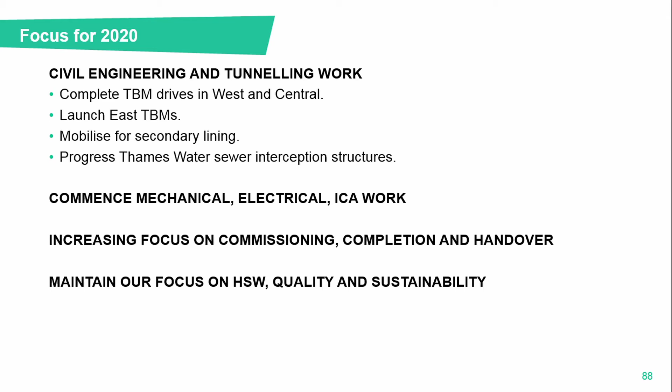I think the project's in great shape, and that is very much because we've maintained a really strong focus on health, safety, well-being, quality, and sustainability. If you get those things right, then your schedule and cost follow. So we've got to continue to maintain that focus.

It's a privilege to lead this project in terms of delivery size. It's such a fantastic project, but we've got brilliant teams across all of the sites, and it's great to see the work the teams are doing on every site. We've seen 4 sites here, but there's 16 other sites that could have given equally interesting presentations from equally excellent, capable, committed engineers.

It's great to see the project developing, but it's also great to see the work going on with teams developing and getting experience of this, and seeing the future of the industry develop on this project is just fantastic.

Just like to acknowledge we've got some great contractors: Balfour Beatty, Morgan Sindall, and BAM Nuttall in the west, Ferrovial Laing O'Rourke in the centre, Costain Vinci and Bachy in the east, and their consultants, Arup, Atkins, AECOM and Mott MacDonald, all doing great work. I know there's hundreds of specialists doing work across the project, and we appreciate all the work that they're doing.

We're looking forward to finishing the project and cleaning up the River Thames, that's what our project's all around. But just for now, our focus is on keeping everyone safe till Christmas. So thank you very much for the chance to come and tell you about what we're doing.

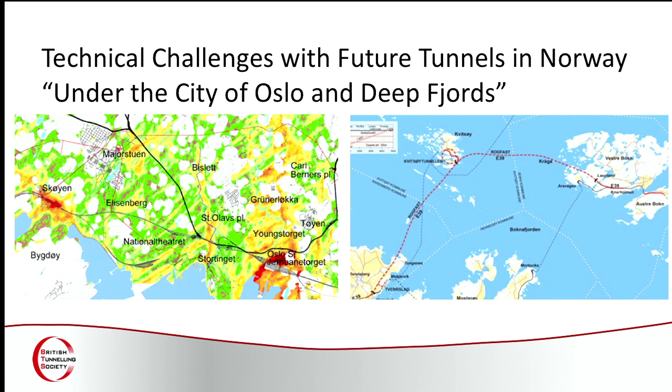Meeting in February, a joint meeting with MinSouth, the West Cumbria Mining Project. And then moving on to the 13th of March, the British Tunnelling Society Young Members Conference 2020, calling for presentations and sponsors. Excellent value, held yet again at Arup in Fitzrovia.

You've seen these stories, we ran them for a few minutes before the start. Two here, one written by Neville Harrison and one by Roy Slocum. Thank you for those stories. And then another story by Sam Simons. A very big thank you to those three authors.